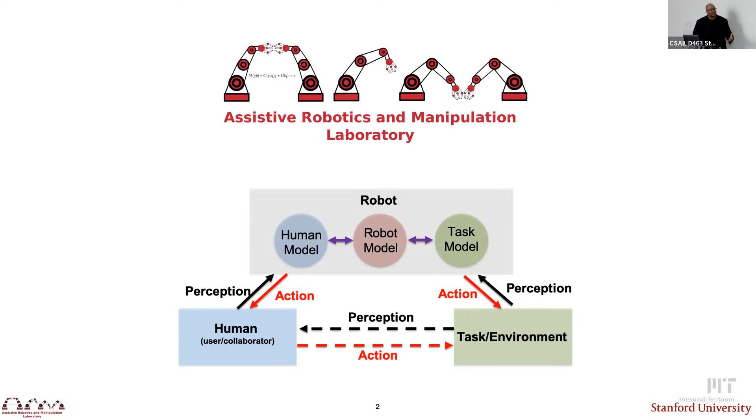Thank you very much for having me, it's a pleasure to be here. Today I'm going to talk to you about our work in collaborative robotics and how it spans from dexterity to teammate prediction. So a general overview of the work in our lab: we think about how robots can become better at completing complex tasks, how they can model themselves better, and then beyond autonomy, how these systems can perhaps work well with human partners.

When I'm introducing someone to the space of robotics, I like to give this huge overview of the space, which includes the robotic hardware design—how do you make your system—the principles of robotic autonomy, how do you think about how your robot perceives its environment, how does it plan its objectives, and how does it actually make decisions and then control to execute those decisions?

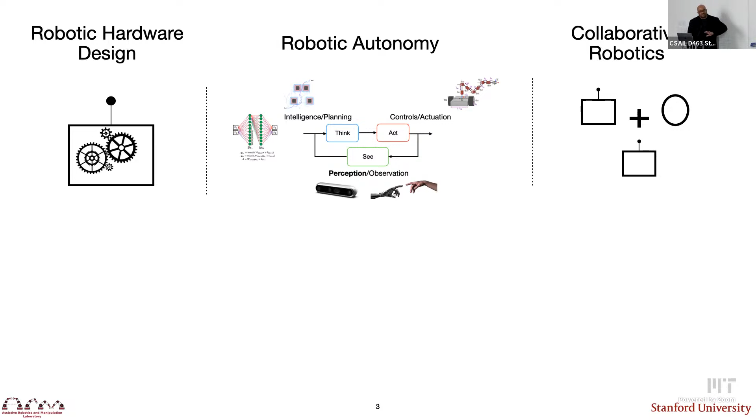And then beyond autonomy, how can these systems become effective collaborators? How can one robot conceptualize the behavior of other robots or possibly people in order to become an effective collaborator? You can imagine many domains in which that can apply. So to give a big overview of all the different types of work in our lab that span this space, this slide is meant to capture that.

Some of our work is in the space of dexterity, and I'll spend a lot of time talking about this one today—thinking about what is the hardest challenge that we identify as keeping robots out of human spaces. We identify that to really be dexterity. And critical to that point is really effectively utilizing the sense of touch, and having that sense of touch approach the capabilities of what a human can do, and possibly even exceed it.

Some of our work also looks into how robots can actually observe a phenomena, and from that data, build an internal dynamics model to predict and possibly leverage and act on that prediction. We think about how robots can be better at completing sequential tasks, and how you can have effective queries from possibly human teachers, and how augmented reality can be a really nice framework in order to communicate that sort of abstract intent.

We have work that moves to the collaborative robotics side, where we ask: can a robot watch people do a collaborative task, such as carrying a table, learn from watching them collaborate, and become an effective collaborator? Can we take this notion of autonomy and the ability to predict what a teammate wants, and even apply it to the space of wearable technology?

So if someone has suffered a shoulder disarticulation and you want to give them this powered robotic arm, can you actually understand what they intend to do? Given all of the decades of robotic autonomy, you may have a good idea of how to do a manipulation task, but really understanding which of possibly multiple tasks they want to execute could still potentially be a challenge. We want to make that as seamless as possible and still provide them a sense of agency.

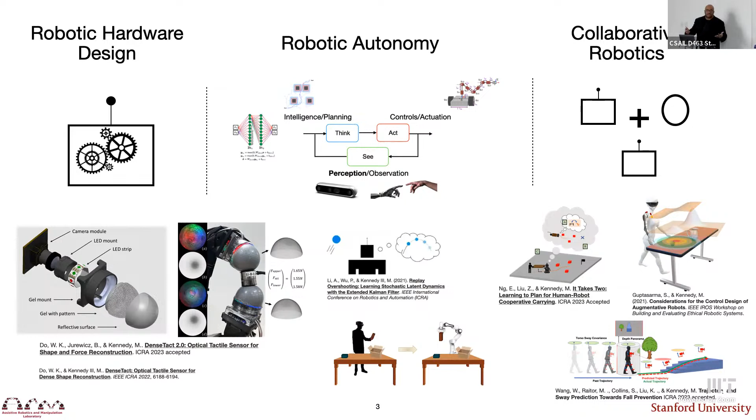And in the same space of wearables, can you imagine being able to predict where a person is going to walk in a cluttered scene? If their stability might be challenged based on where they would walk, could you possibly alert them and, first of all, even understand that they may be at risk? This gives you a big overview of the kind of spaces that we cover.

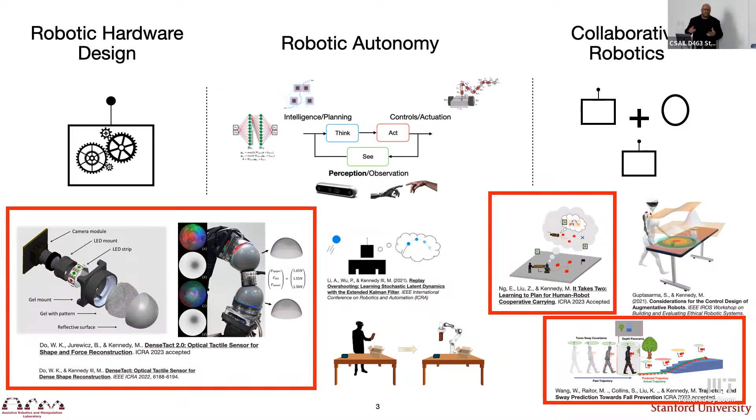But today I'm just going to highlight three projects and focus first on dexterity, and then two projects in the space of collaborative robotics, with some high-level takeaways for how you might think about these types of problems. To really motivate this, you can think of two huge spaces that I think really motivate the need for robots that can touch and manipulate the world like humans.

If you have the case of assisted living, it's really important that very soon we have systems that can augment healthcare so that people can better age in place. To be effective, it's one thing to be able to communicate with these people. It's another thing to actually be able to do physical tasks with or for them, such as even picking a pill off of a table and placing it in their hand.

On the other side, you have this huge industry of manufacturing where it's still an unsolved problem to do very small object manipulation, such as assembling a phone. There's a multi-billion-dollar industry where people literally have to do these types of tasks by hand, and not all of them are humane. So it would be great if robots could step into this field and potentially do these tasks that have so far been strictly outside of the domain of robotics.

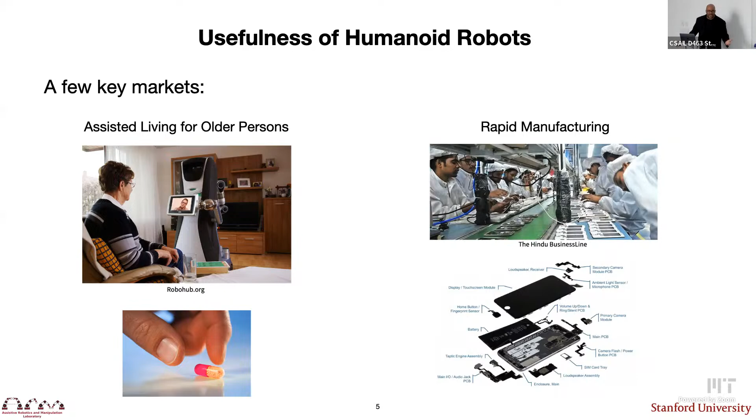And if you say, well, you can build these specialized assembly lines for these types of tasks, some of the technology changes so fast that that's not actually a feasible thing to do.

The field of robotics has grown immensely over the years. You have this one system on the side that's falling down the steps, and now we have Boston Dynamics doing backflips. Locomotion has been incredible. Perception has been incredible. Even sort of understanding your own proprioception, where your arms are, has been really well advanced with motors that we're able to use nowadays, but we still don't have these robots in our spaces.

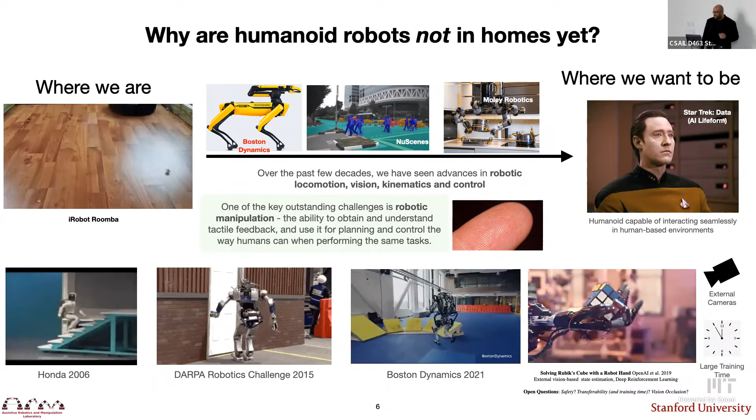And if you have to narrow this down to one reason, I think it is robotic manipulation. So thinking about the importance of touch and where this domain might be really effective...

You can think about some toy examples here: detecting incipient slip. When slip begins to happen, how do you detect it and react to it? If I want to assemble a very small object here, like this microchip board, how do I actually do that effectively? If I need to manipulate soft and deformable objects, how can I do that? Well, if I need to perform in-hand manipulation of an object, how can I conceptualize that and have a model that abstracts well for perhaps a learning mechanism to actually plan how it should manipulate an object in its hand?

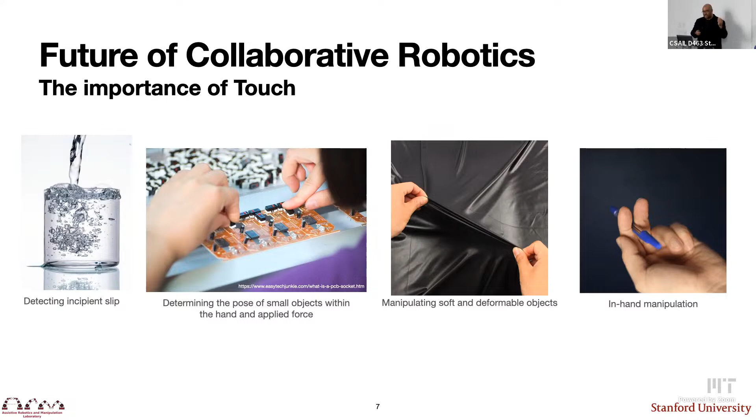If you think of this broadly, you can have these power grasps where the goal is really to immobilize an object. And then you have these precision grasps where the goal is probably to do something effective with the object once you're holding it. Based on what you're trying to do, this might definitely change the definition of what grasp success means for you. And to add to the complexity of this problem, the question might also be: what type of finger do you have when you're touching this object?

Is your finger really rigid, so there's probably a very small area of contact? Or could your finger potentially be very soft, in which there's actually a very large region of your sensor that's in contact with an object, even when that object is oddly shaped?

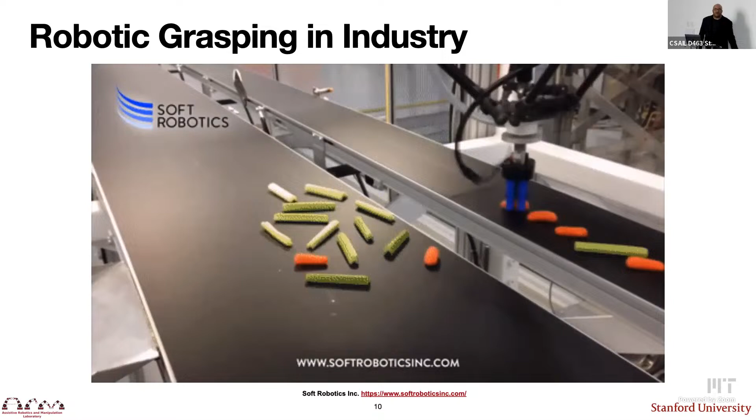So how does industry really address this right now? Well, one idea is to approach this from the notion of building a very soft, deformable gripper. Here you see this effective tool where you're able to use this soft gripper to actually grasp these objects in this space, and it does a really good job in terms of form closure.

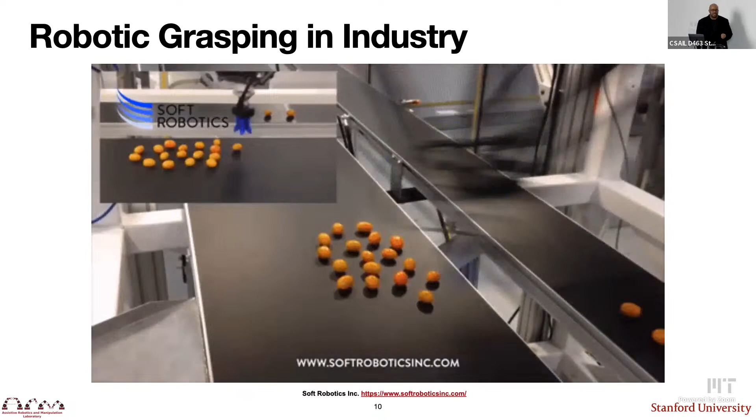I can grasp these, even fruits and things, without damaging them. But if I asked you, could you actually pick up a pill with this? That might be a lot more challenging. And if I said pick up a pill and put it in a bottle, this might not be the gripper for you.

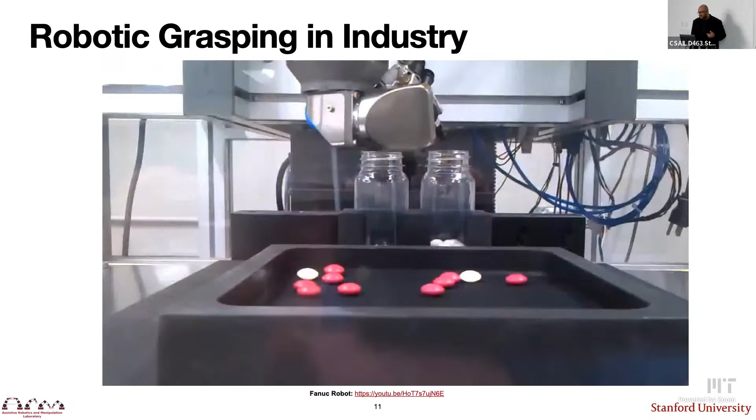So one way to accomplish this is to move in your design space if you wanted to do something very precise, and perhaps think about something in the pneumatic range. Here you'll see this robot. It has these pills that are very smooth, placed down on this surface, and then it's able to take a picture and use this sort of suction pneumatic gripper to adhere itself to the different pills and perform this sorting task.

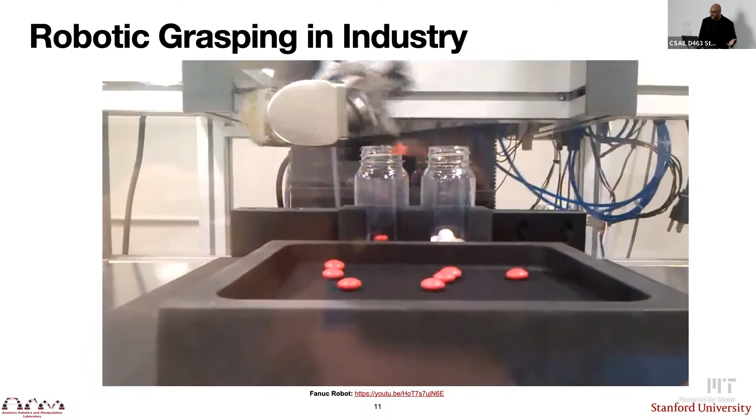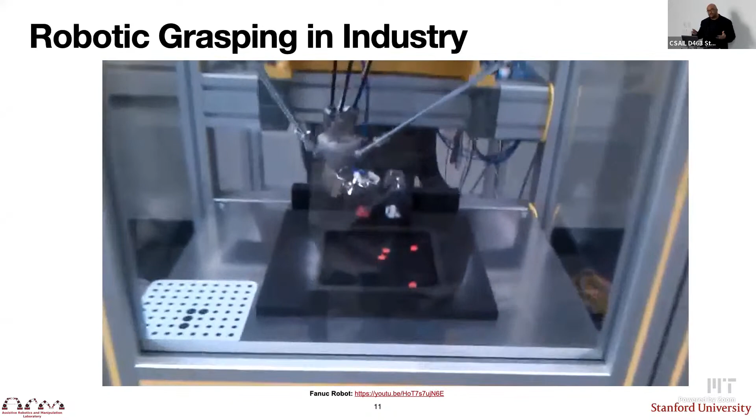This works well in that domain, but there are a few key assumptions that have to be applied for this to work. One, your surface has to be very smooth, such that when you try to apply this suction, you can hold it quite well. What if your object was perforated? What if it was larger? Is a suction cup always going to work based on whatever material you have? What if the material was soft? So maybe it won't work for every scenario, but it might still be quite useful in some.

And then the question is, well, do you want a more generalized solution? And what would a generalized solution look like? Building more fundamental knowledge and thinking about what we could potentially achieve, you have two areas to pull from here: form closure and force closure.

Form closure just says I've geometrically trapped this object. Force closure says I'm squeezing it, and between my physical contacts and the friction that's induced, I'm able to reject a certain amount of external forces or wrenches that might be operating on this object. This is the sort of formal definition that has been used for the immobilizing question in terms of grasp quality.

But even if you can say my system might not exceed the bounds of this and slip out, how good is my particular grasp? If I have a dynamic wrench being applied, I may need to know where I am inside of my limit surface, my wrench cone, in order to be effective. And that requires some sort of measurement.

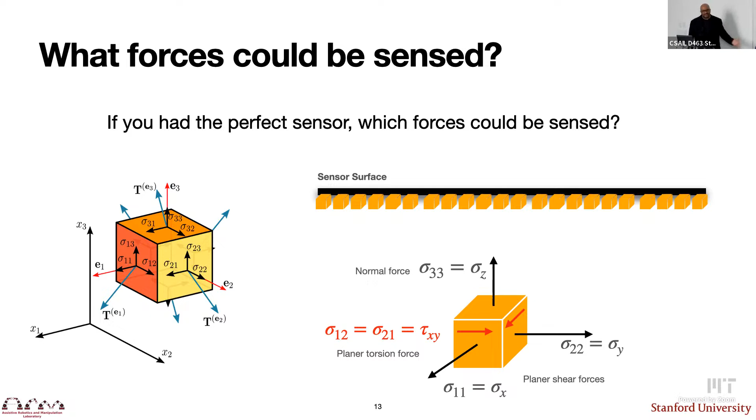The holy grail would be a sensor that, if I could zoom in to any point on the surface, the continuum mechanics of this problem would let me get knowledge about my surface normal, my planar shears, as well as my torsion at every single point. This is the best you could do in terms of forces for a surface. And of course, you'd probably want to know the shape of that sensor, where every point on that surface is as well.

If we look at how humans achieve this, we have mechanoreceptors. These effectively sense vibrations and pressure, and they're able to work together to send our brain signals about the types of contact we're experiencing at the surface of our finger, with each mechanoreceptor being responsible for about 3 to 4 millimeters, working together to give you this high resolution feeling.

And if you were to give someone anesthesia in their hand or feet, you can actually see that the quality of their ability to do many tasks greatly reduces. An interesting note is that this information is sent to a particular area of the brain, this cortex, and it's used to tell the brain this is the area that actually felt that contact when you touched.

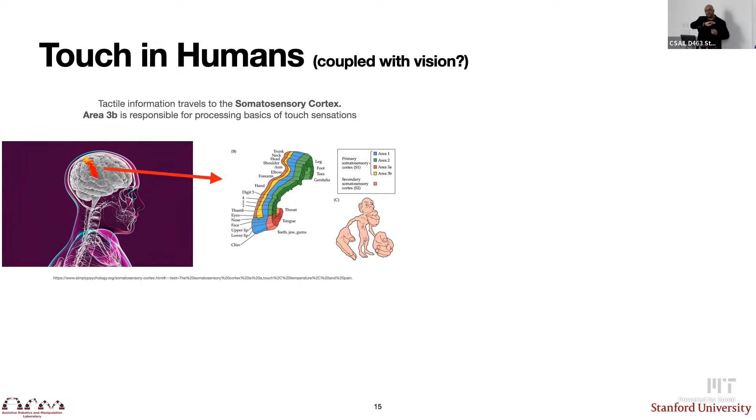There was a study where they put a camera between the person and their finger. They showed their finger being touched as we're actually touching them, and showed their hand being touched when we don't touch them. The area of the brain dedicated to giving you information for actual physical contact, if you have a very sensitive MRI, would still give you some feedback saying something should have happened here, which is amazing—that we have this ability to correlate vision to the sense of touch, even though physically there's no connection there.

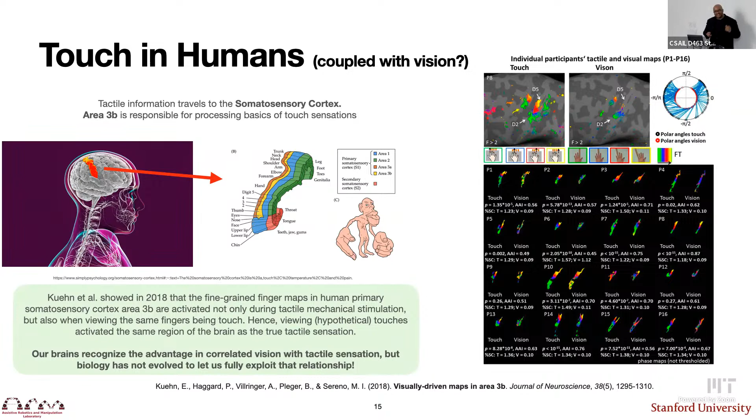So maybe one day there'll be a very cool octopus that has eyes in its hand, because that might actually be very effective as we're moving towards this.

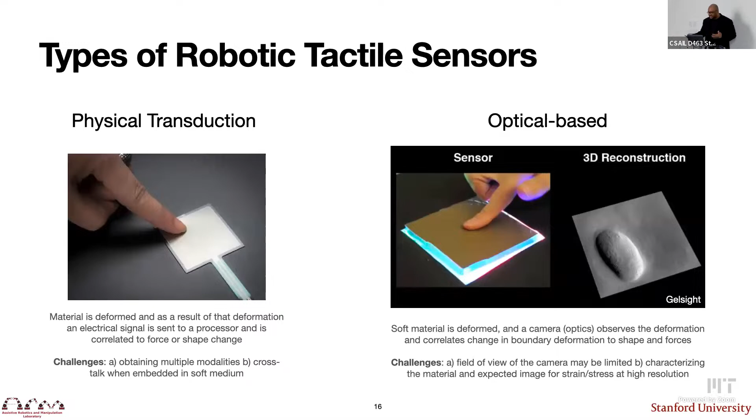The types of tactile sensors that exist include physical transduction and optical based sensors. For physical transduction sensors, you can get good readings, but it's really hard to get multiple modalities of sensing at a very localized high resolution area. If I have a capacitive sensor, I could have an array of capacitance, and that could be good for sensing surface normal, but if I also wanted shear and torsion, I'd need something more complicated.

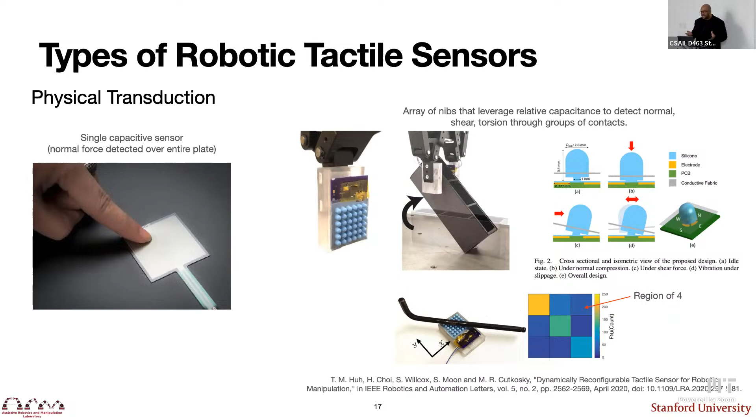This is a recent paper out of Stanford, from Mark Cutkosky's lab, where they're detecting the deformation or motion of these nibs, using the differential in capacitance to tell you what type of force it's undergoing—normal, shear—and you need a group to give you some notion of torsion. But as you can see, things are kind of spaced out for this. How do we think about getting more information at a denser area?

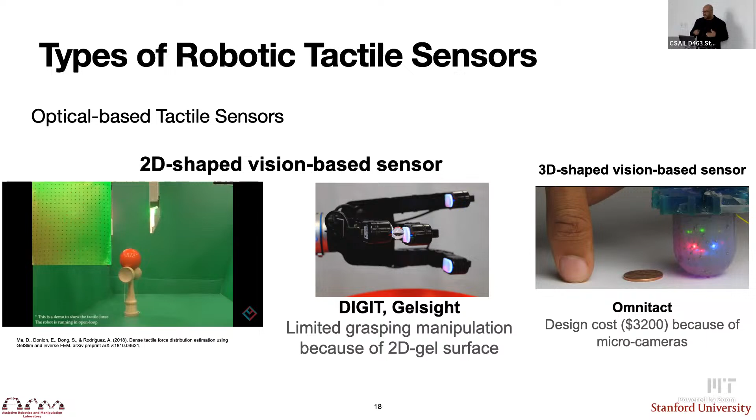Some of them are flat and small, others are small and more circular. But usually they're also pretty rigid. They're soft because they have to track the strain, but if you try to really deform them, they don't deform an extreme amount.

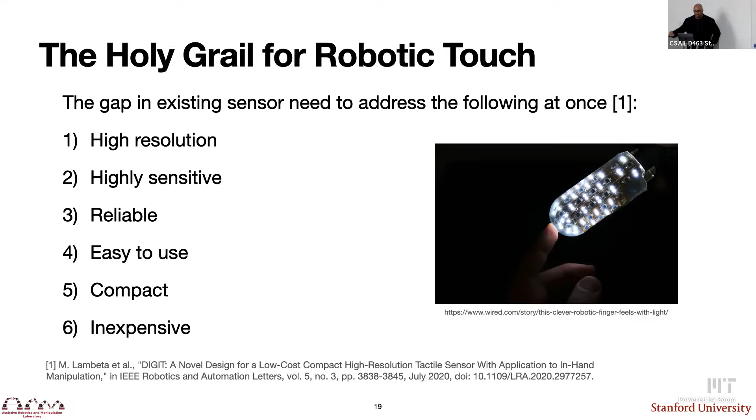This paper did a really nice job of outlining what would be the holy grail for robotic touch, and I happen to agree with their summary: it would be great to have something that's high resolution, highly sensitive, reliable, easy to use, compact, and inexpensive.

This led us to design DenseTact. Our first generation was quite large, but operated under the principle that we could observe the deformation of the surface and then use a very unique calibration method that would allow us to perform regression, so that we could tell you the exact metric distance of every point on the surface of the sensor.

We're not alone in this space at all—there are a lot of different applications that try to use the same thing, and all of them have similar components. You have a sort of soft gel, and the softness varies based on which one; some interior LED illumination; a camera observing the interior; a sensor housing; and possibly some off-site computation.

For this first work, we really wanted to drive home the resolution for shape sensing, and that's what I'll get into now.

For this first design, at a high level we have this elastomer—a very, very soft silicone gel. We have this silver paint that we put on the boundary of the sensor. We have LEDs that illuminate the interior of the sensor, a 3D printed housing, and a camera that looks through to see the interior of the sensor.

I'm going to talk briefly about the camera calibration, how we did that for shape reconstruction, and how we modeled and calibrated it. When we first started off in 2019, we didn't know anything—we were like, let's try putting a bunch of cameras inside of our finger.

So some really cool applications: we could perform some really brief in-hand localization using ICP. I'm going to jump to this particular part in this video, if it plays, that really shows how well we can do when we're touching an unknown object. So here I'm pushing a screw that was not in the training set into the image. You can see the deformation here. You have the depth map from our regression integration, Poisson integration from our network, and then you can see the point cloud that's reconstructed.

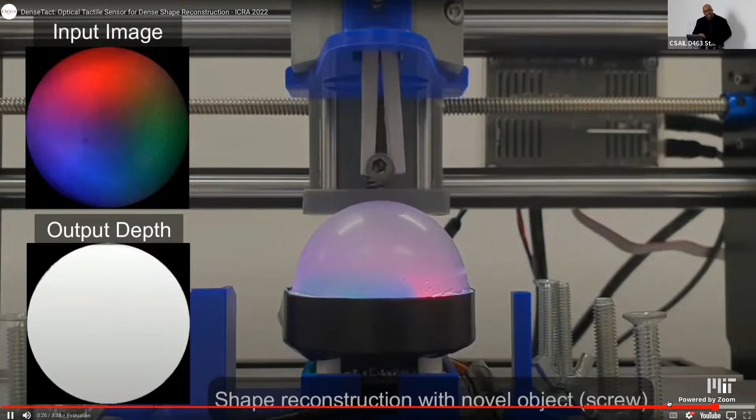One thing you'll notice is you can actually see the threads in the raw image, but they don't show up here because the size of these threads was actually smaller than the resolution of the printer. So it wasn't that our model couldn't potentially learn it, it's just that it wasn't in the supervised set when you were performing the regression.

So that was great, but then we wanted to add forces to the mix. So we created DenseTact 2.0. To that end, we said, well, if we want to add forces, like others, you need to actually have markers. A very popular approach is to just put dots on the surface of your sensor and track those dots. If those dots, for the softness of the sensor, are too close to each other and you perform deformation, you can have this sort of aliasing effect under pure shear.

And so one way to get over that is to track the deformation over time and say, okay, I actually observed this motion, I need to keep track of it. That can be computationally expensive. Alternatively, you can imagine giving your sensor a very complex pattern inside, such that when you deform that sensor dramatically, you're able to say, actually, I know what the original shape was. I can avoid that aliasing effect if my sensor is extremely soft.

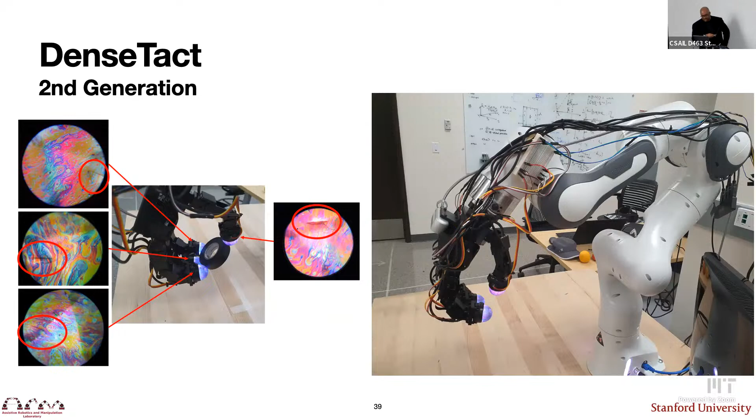So our first attempt was to use a hydrographic film. It's like this sort of papery material that floats on the water. You dip your sensor into it and you get this display, and that's what you see here. The challenge was that because it's sort of like an oil pattern, the pattern density was not uniform over the sensor. So this first one you can see hooked up on our Franka arm with a camera on top, holding an object, and what that might look like.

So this brought us to the final version of our pattern deposition. What we essentially did here was we used Voronoi tessellation. We had points that were evenly spaced all over the surface, and then we used a traveling salesman method to connect all the dots without crossing any lines. We put this on a stamp, which we then stamped by hand. Because we stamped it by hand, no two sensors are alike.

And the colors that you see here are just taking that raw image and putting it through a dense optical flow. Colors correspond to direction, magnitude, the intensity of that deformation. So this is the exploded view of DenseTact 2.0: camera, LEDs, very soft gel, the pattern that we deposited, and then our silver silicone spray so that the whole thing is homogeneous in terms of being silicone.

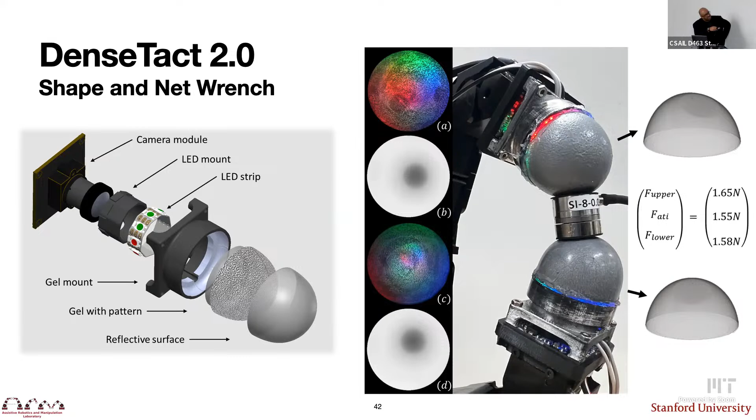So thinking about how this fits into the big picture, it's very similar to what we said before, but now we're really focusing on what we can do in terms of that force deposition and tracking, using markers to track those force estimations.

Comparing DenseTact 2.0 and 1.0, we have a fraction of the volume, about a third of the volume. We are at an even cheaper sensor cost. The camera we're using still costs about $70, but everything else brings us to less than $85 to $90, or well under $100 per sensor.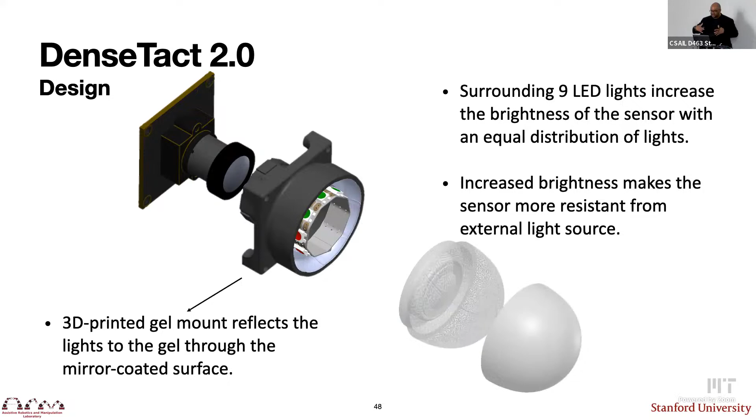Again, looking at that exploded view, it's modularized, so it's easy to take apart and put together. Again, you have the LEDs, which you can control the brightness of. You have this housing that has a reflective interior to help shine the light into the center of the sensor. We have the pattern deposition technique that I mentioned.

We have the camera module, LED module, gel module that all fit together for your sensor. To collect the position, we take this sensor and we attach it to a CNC machine, and we actually run this through all of these different touch points in order to collect the data. And you can see that in some cases, you're well over 30,000 touches in order to train even one sensor to do a decent job in regression for the shape estimation.

To train the forces, this is how we did it. We had different kinds of tips that we then touch our sensor with from different directions. And we actually are able to map the image that we see, the deformation of these points, to a 6-axis wrench measured from this ATI sensor. You can then transpose that wrench, the torque component, wherever you like with simple mechanics.

To do this, we again used a neural network to perform the Poisson integration, and we also used that same sort of architecture to learn the forces as well. We benchmarked two methods: a Swin transformer that looks at areas of your image and then understands how those build together to give you your output. We compared that with DenseNet, which uses convolutional neural networks in this autoencoder structure as well.

And what you can see is that we were actually able to achieve comparable performance in shape for sensor 2, similar to 1. And we have this ability now to also measure the forces and torques as well. Some key takeaways: we were able to achieve 0.36 millimeters L1 error per pixel for shape reconstruction on 1,000 images, and 0.41 newtons for forces, 0.38 newton millimeters for torques. And we also said, well, that 30,000 touches is not trivial, even if my student can leave it on the CNC machine and go.

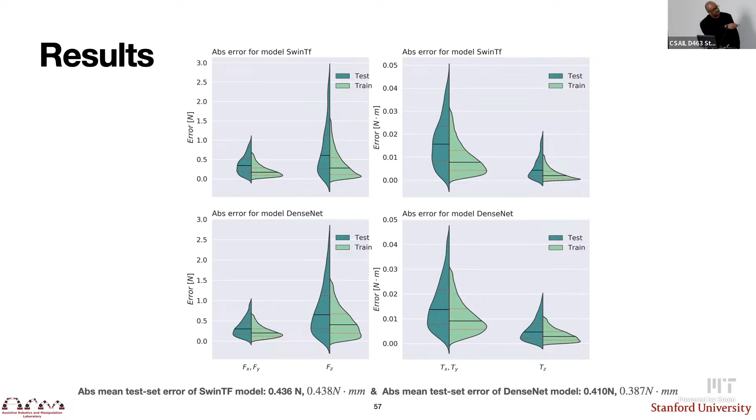These are similar results that you can see for the forces that we're able to measure. Again, DenseNet on this bottom row performed quite well. This plot shows the forces Fx, Fy, and Fz, the torques as well. And you can see comparable performance for the test and the train. So pay particular attention to the dark green for the test performance.

Again, talking about that transfer learning validation, we were able to do this for both the wrench as well as the shape reconstruction with only a fraction of the data, so less than 5,000 points in order to do the same thing. So we're training in a fraction of the time for our sensor. So what can we do with this?

So one of our ongoing projects that I'm very excited about is manipulating objects between the fingers. So if you actually have these DenseTact fingers, just thinking about shape, not forces for the moment, can I reach into a bin of screws, grab multiple screws, and then once I do some classification to know which screws are there, could I potentially roll my fingers on each other to select a particular screw to perform bin sorting?

So to achieve that, we built our own little Dynamixel gripper. We attached our hands. We can reach into this bowl, grab screws and nuts, and then perform this sorting task. And this is ongoing work, which we hope to have completed shortly with screws that are even smaller than what you see here, to really give us a chance to work on that control in terms of rolling the fingers together for very small part manipulation. To achieve this, there's 2 ways to go about it. One is really leaning into the domain that you know you're in.

So if I know I'm picking up a screw, I can actually perform some basic computer vision techniques to extract important features like the length dimension of the screw and the head of the screw. If these become a feature space, I could then perform classification to determine which screw I'm holding. But more generally, I might want to think about saying, well, if I kind of know the region that I'm looking at and I can be sort of pose invariant, could I classify that directly?

And this is a target architecture. We're trying to achieve that. This is important because we believe that we may actually be able to extend to other items really quickly, specifically the counting and sorting of pills. And so here you see this sort of Tylenol pill, 438 is written on the surface. You can see the rough circular geometry.

You push in. If you watch this video again on YouTube at very high resolution, you can actually see the 438 there, and you have this sort of density map. This is an artifact because this is just a quick sensor we were doing a quick test with, but usually you don't see that sort of artifact.

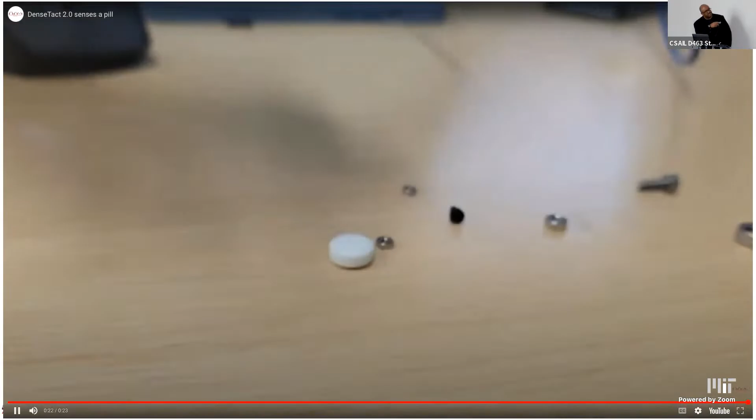And so you can imagine being able to figure out the geometry of the sensor, and then once you know the region of the camera of the touch that you're interested in, you could zoom in and search really easily to find the writing, and then that's a really cool way to actually make sure you're about to hand someone the right pill.

And then that can actually augment my NeRF and allow me to do a better job of constructing this object with a neural field, and perhaps even using that combined representation to get other object properties and have a brand new way to represent or provide a digital twin for objects that I might want to manipulate and hallucinate future observations, be it camera or touch, if you've done it enough to collect it over this object.

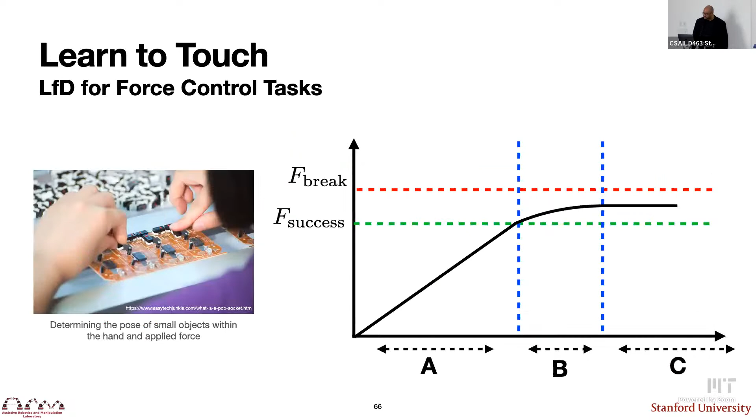Kind of leaning into how we might use this for force-based tasks. A question we're asking is, what if we're touching a very soft object and perhaps there are beads embedded underneath and I want to feel it, maybe moving toward use for tumor detection on a person? How could I potentially achieve that? So to set this up, this is work that's ongoing, almost complete.

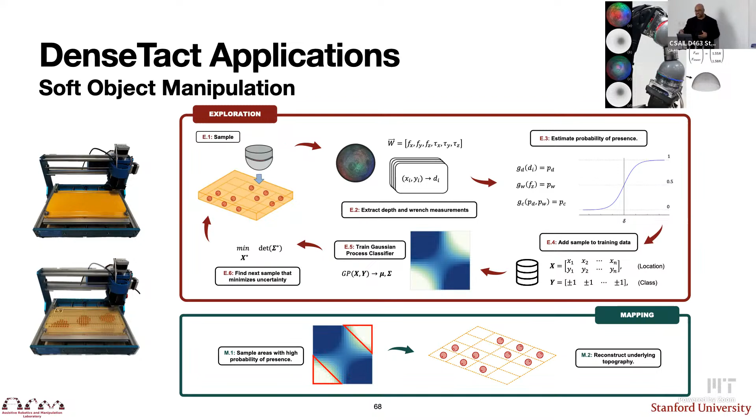DenseTact 3.0 is on its way. So we went from one that is a few centimeters tall now to one that is about 1.8 centimeters on edge, about the size of a human thumb, the average thumb. The kind of explosion is very similar.

What's different, we've fabbed our own boards here for the LED. We have Arducam that fits in here. We then fab our own lenses, and then everything fits in as shelves. And then you fit your gel in on top. So this first one was kind of flat. We were going for skin by having an array of these. They're only $30 per cell.

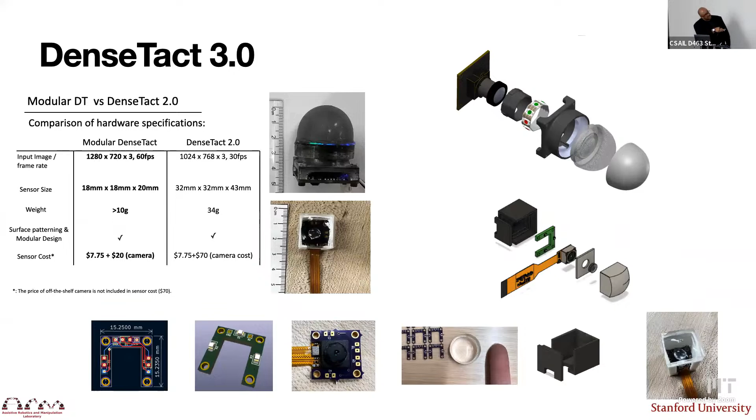But now we're going back to a more curved shape because we realized shooting for the stars, we landed on the moon for a much smaller finger for our system. And so, yeah, this is the order. If you're interested, I brought one of these boards with me. You can see it for scale after the talk.

So thinking about what does it take to actually perform good shape reconstruction. I mentioned that we 3D printed these objects, but I really didn't give a good insight into how we actually came up with that. And so there are a few principles that we employ and we could employ, and what we're going to do for our next sensor, which is thinking about how for that surface, we need every point to be in contact.

We want it to be sharp and have interesting features, but it shouldn't be so sharp that it would cause the gel when it's touching this object to diverge and break off of the surface. And then we need to make sure that we actually have at least one point when we're fully in contact that's not deformed to make sure that we ground ourselves and don't have a distribution shift. And then make sure that we have interesting features.

And then this can become a very interesting optimization problem in terms of saying, if I have control points that I'm interpolating, how can I control their motion in order to create these objects? And so if I have multiple surfaces that I'm touching in, I'm maximizing the entropy between them while maintaining these stated constraints.

And so with these, you can do some very interesting things, hopefully in the future in terms of finger gaiting, even with this type of model. If you have depth images, if you have high resolution force information, force field, can you actually talk about finger gaiting and even reveal this to a learning model to train?

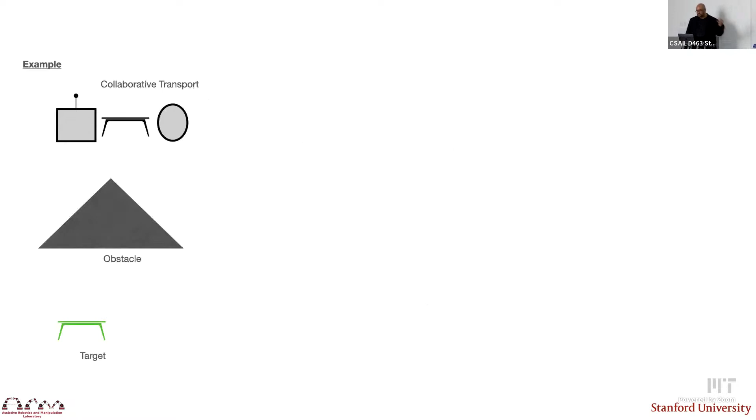And this leads us to this whole notion of theory of mind. How do I think about what you're thinking about? And am I thinking about that you're thinking about possibly me as well? That's theory of mind, first and second order. If I give you this toy example, these two agents trying to carry a table around an obstacle to some goal location, I can phrase this in a sort of control framework.

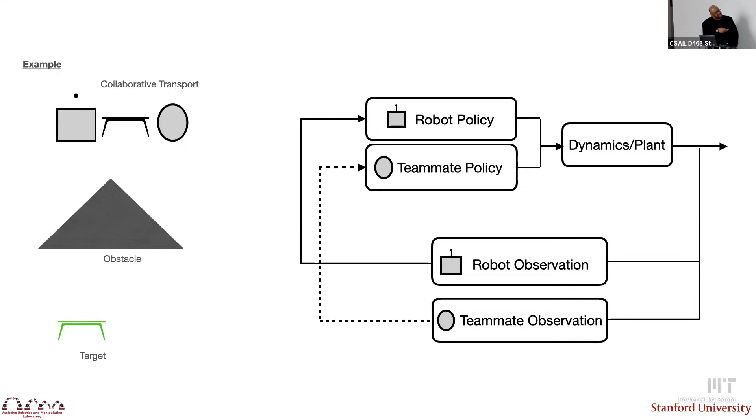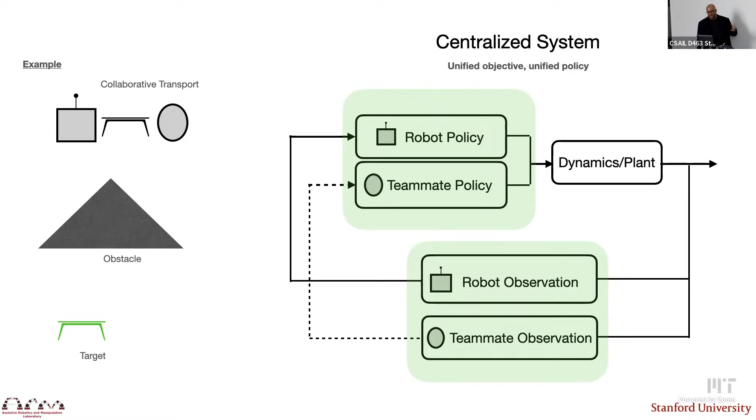I have a robot policy, a teammate policy, there's some world dynamics. Both agents are able to observe what's going on, and this loop closes as they're trying to perform their objective. In a centralized system, arguably the best you could have, there's clearly one objective, which your centralized oracle has decided on, and it's controlling what every agent in that system can do.

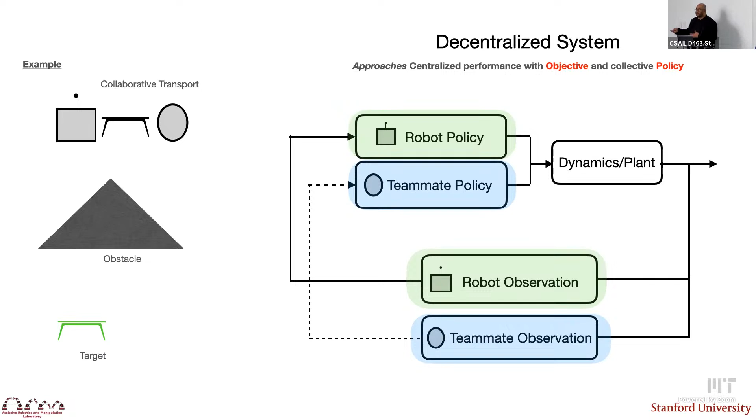The interesting case which we're looking at is the decentralized system. And so then we have to first say, A, do you have the same goal? And B, if you're trying to do the same thing, if there's agreement there, are you capable of actually executing that task effectively as a team?

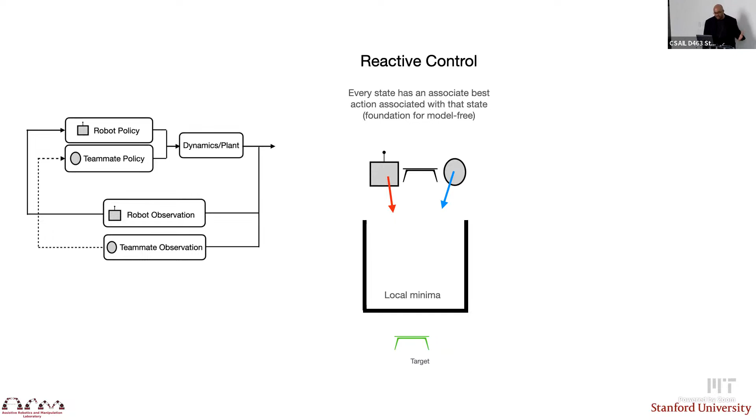So thinking about the modes of control, on the one hand you have reactive control. You simply know where the target is. You don't do any sort of planning. You're just trying to respond to your current state.

The other is where you might actually take into account how both your objectives and possibly other factors in your environment, like this local minimum presented here as a barrier or a hallway, might influence the way in which you decide to move. If you can take this sort of planning mechanism into account, then this may need to be a part of your teammate cognition model, in order to understand how they would plan around these more complex barriers as you're trying to execute this as a team.

So the very first question we have to ask is, do you agree on your goal? If you do, then you can directly use that to inform the policy you think the other agent would do and hopefully predict their expected behavior. If you don't, then the very first thing you need to do is reach consensus in order to be an effective team.

If you're trying to reach consensus, you might realize there might be different frameworks you could be under. Is there a hierarchy? Is there a leader-follower relationship? Or perhaps is there some sort of voting that needs to happen between equal partners?

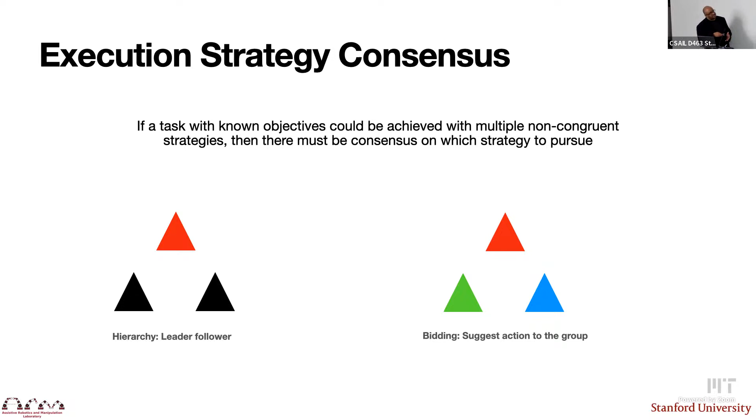And then another question you might have is, where does that sort of source domain knowledge come from? Did it get demonstrated to the robot? Did the robot have the chance to interact in the environment before it began to do some sort of collaboration? Where does that prior come from? Is there a prior that you're able to leverage?

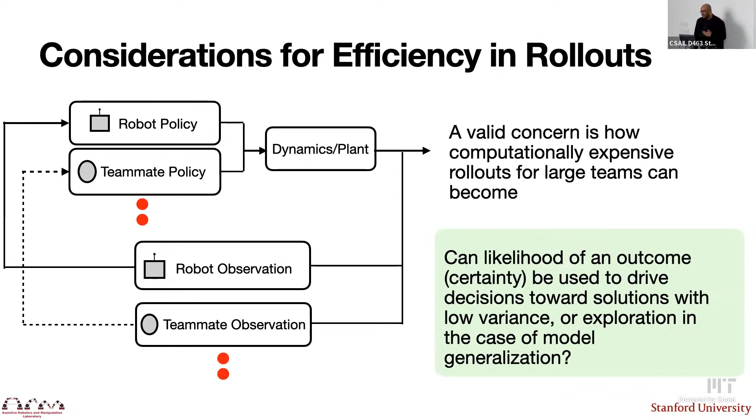And then after all of that, depending on how many agents you're collaborating with, another consideration is, how do you effectively perform these rollouts in a computationally tractable way?

So I'm going to present two projects that we're doing that looked at aspects of the factors I mentioned here. The first is human-robot cooperative transport.

Under this paradigm, as I mentioned at the beginning of the talk, we want a robot that can learn from humans performing a task, be able to extrapolate different options, and then execute what it thinks will be the best option as a collaborative team.

This is the architecture that we use to execute this. We observe how humans work together, and we observe how our collaboration is going. This creates for us a latent strategy, Z of T. We can then have motion predictions, select a plan, and then use that to execute a rollout.

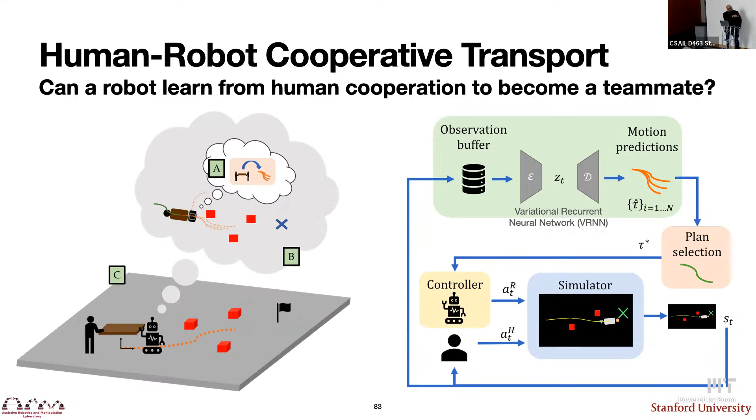To compare this, we looked at what you might choose naively off the shelf. One might be the RRT method, where I'm planning feasible trajectories and then controlling with a PID controller along those trajectories, with a human on the other side trying to work with me.

Because I'm not taking that human's actions into account, you can see that only a fraction of these rollouts perform quite well. Whereas if you do this variational recurrent neural network approach, you're actually able to do a much smoother long-term prediction, and in fact this collaboration works quite well empirically.

Another way to get deeper insight into that collaboration is to actually look at the interaction forces while the agent is executing this. The interaction forces say there's a wrench force that's moving me to my goal or causing motion of the table, but there might also be forces that, when they sum up, are equal and opposite, and so don't result in motion of the table. They would either compress or stretch the object, and depending on how large they are, that's probably a really bad use of your energy.

So you might have some interaction forces to carry an object, but they probably would be bounded if you were collaborating well. A decrease in those interaction forces below a particular value is usually associated with teammates actually reaching a form of consensus. And that's what you see here comparing these two modes, VRNN versus decentralized RRT.

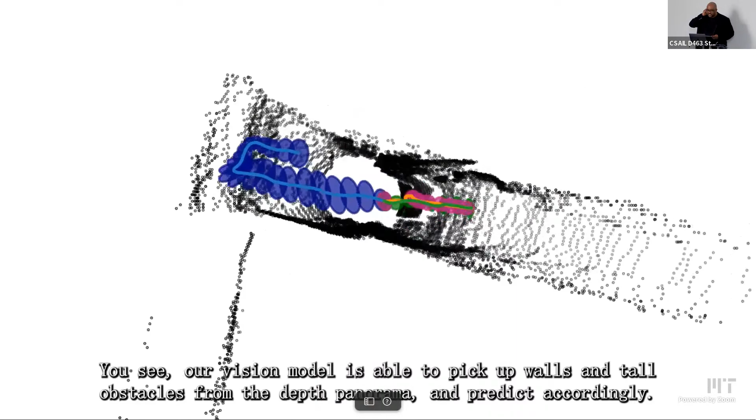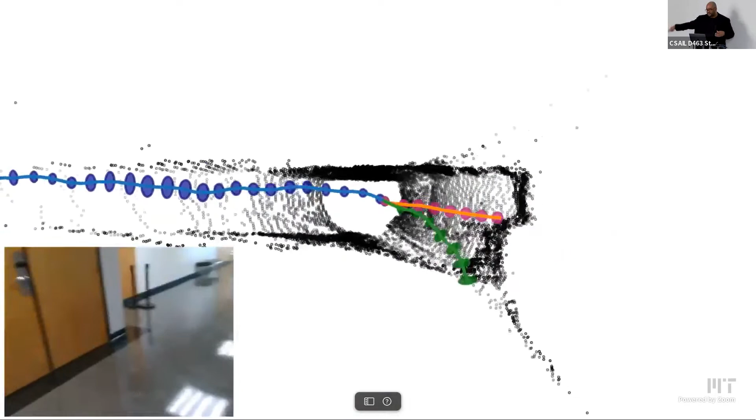The model predicted that he would turn down the hall, but he actually was going to do a U-turn. So the model adjusts and begins to predict as he walks. It's not great about windows. As he'll demonstrate, there's this window that's going to pop up on the left, and it's going to predict going through those glass doors. And there you go. Then it predicts this right-hand turn and is able to predict it.

So this is where we're currently at. This is ICRA 2023, showing our ability to predict that covariance in future path.

So what's next? One, it would be great to predict multiple paths, a multi-path hypothesis: of all the places you could walk in a scene, where are you expected to walk? How can we put this model onto a mobile device so that people like the elderly can leverage this type of tool in a relatively easy form factor to utilize? And then we need to move from our younger adult population to the communities that might benefit the most from this, like older persons and those with different disorders, and even think about how we might apply this to lower limb exoskeletons as well.